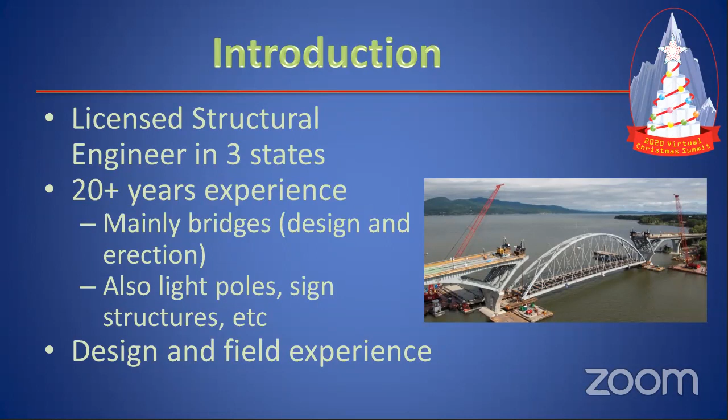There's a lot of people out there that have had experience, but they don't necessarily know what they're talking about. Or when you're first getting into it, you don't know what is good and bad or who to listen to. So I put this slide in here not to necessarily brag, just to say I've dealt with this stuff on a much larger scale.

And this is why I'm giving these tips to people, what to look for, what to avoid, what to pay attention to. So I'm going to talk a little bit in the introduction about what is a megatree. Here's a bunch of pictures of megatrees that people use with all sorts of singing faces on them. They don't have to have faces, you don't have to have pixels. You can have whatever you want, just single LED type lights.

But it's really tough to define what a megatree is. So basically, I just said, well, it's any type of pole or pole-like structure, because a lot of people use trusses, that you use to hang your lights off of. And I'm going to say it's going to be tall enough that it could fall over, and kind of the important part is to do damage. If you do something that's 4, 5, 6 feet tall, if it falls over, no big deal. You can drive those in with those little green fence posts or something like that, use a piece of PVC. You're not going to have too much damage.

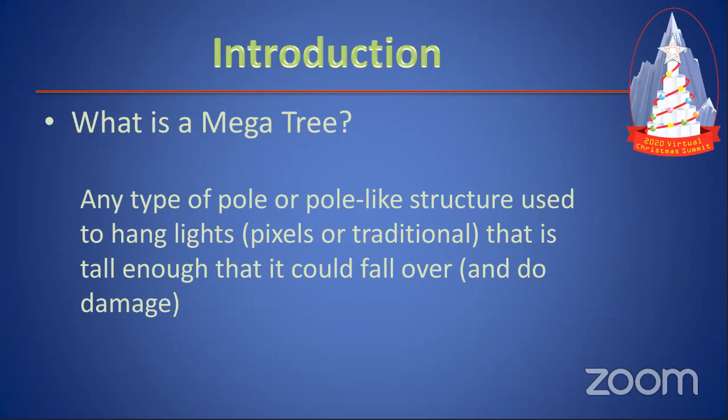When you start getting into 8, 10, 12 feet, that's when you start really getting into that - that can do some damage. That's a little harder, you need a ladder to get to the top of it. You get anything into the 16, 20 foot range, then you're starting to get even more dangerous, and over that, even more so. So there is no limit of how tall a megatree is, but I try to make these tips good for anything - the bigger, the more concerned you have to be with it.

So these are the 10 tips. I'm going to give them to you now just so you can take a look at it and see my 10 tips for it: use guy wires, you got to pay attention to your anchors, you got to have a good base, you got to have a good pole, you got to have a good topper, you want to make sure it's level and plumb, you need to know how you're going to assemble it, good, fast, and cheap - those are all important factors with it, and a lot of people are too overconfident in what they do.

And there's a lot of misinformation out there. So there's my 10 tips for megatrees. If anybody has any questions, I'd be happy to take them. I told you I was going to try to keep this short, and I did that.

Obviously I am just joking with that. I'm going to go into much more detail, but I like to joke around as much as I can and keep it kind of interesting for people. So please don't run away quite yet.

So guy wires. Guy wires are probably one of the most important things and most overlooked things that happen with megatrees. My simple tip for this is use the guy wires. Unless you absolutely positively know for a fact you will not use them, use them. They're cheap insurance. They help with a lot of things.

Most of us are not designing our megatrees in the sense that we're having an engineer come out, look at it, do things. We're not necessarily getting anything pre-built or pre-done. We're just kind of going out there, finding materials we can, using information we found online, putting something together and hoping that it's going to stay up.

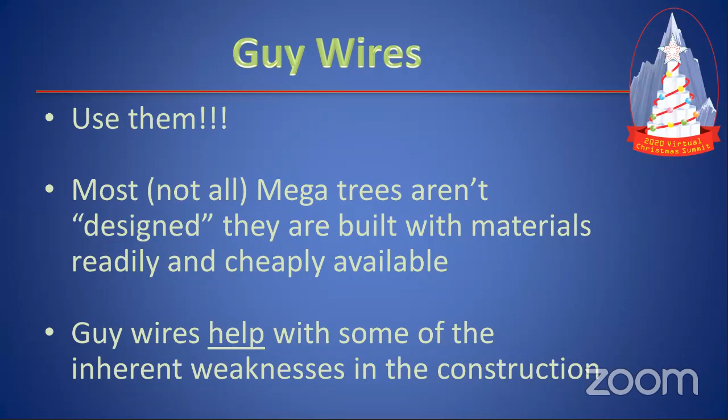The only reason people don't use guy wires is they don't have the space or they don't want to spend a little bit of extra money. But the small amount that guy wires will cost you for the extra insurance of keeping it from falling over, in my opinion, is well worth it. So use guy wires if it is at all possible.

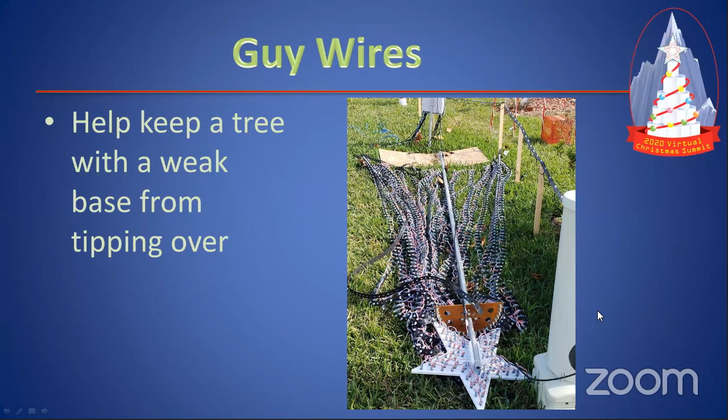I've taken a few photos from a presentation I gave last year during the X-Essentials. You can see here, this pole had a very weak base, very poorly attached to it. No guy wires, fell right over. I don't know if this was during construction or during a wind. Guy wires would help keep this from happening.

Same thing with this. The pole stayed nice and straight. Obviously this pole, or the picture, is a little bit crooked. The pole stayed nice and straight, but the top bent right over. Again, guy wires up at the top would have helped this from happening.

There's a lot of things that guy wires will help. Bad connections at the bottom of your pole where it screws in. A lot of these pictures don't go together, but when you have pipe with threads, the threads are a weak point. They'll tend to want to break. They'll tend to want to fail.

A lot of people have problems here. That's okay if you have guy wires holding up the rest of it, but if you don't and you're just relying on the stiffness of the pole, this breaks, your whole tree comes down.

Another thing to pay attention to is guy wires only protect what is below the guy wire. This is pretty well secured here. You'd probably want a third guy wire, not just two of them here, but it looked like there was only one up at the top holding things. The other two, I don't know if they weren't installed or failed. The bottom stayed nice and strong, the top ends up tipping over. You want to make sure you have three of them at all levels and they're very well secured.

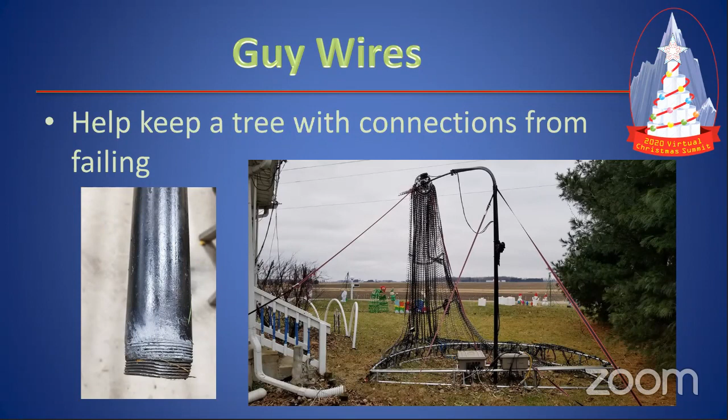So guy wires will help with this. Use them if at all possible. They are well worth the investment.

Generally speaking, with guy wires, you want to install it as close to the top of your pole as possible. I realize realistically you cannot put them directly at the top. You probably have a topper up there. You don't want the guy wires coming out in front of your lights. You kind of want them hidden behind your lights and that. It doesn't have to be right at the top. Get them within the top 2-3 feet.

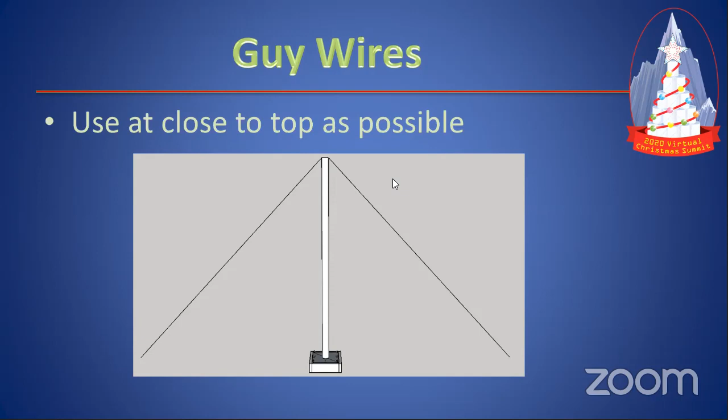It depends how tall your pole is. If it's 16 feet tall and you put them 4 feet down, not a big deal. If you've got a 20-foot pole and you put it 8 foot down and you got a lot more sticking up there, that's a bigger deal. So as close to the top as possible with your guy wires. The bigger your pole is and the more transitions you have, like here, if you have a thick bottom section and a thin top section, add 2 layers of guy wires, 3, 4.

It doesn't matter how many layers you put on there, they're all adding stability. They can come down to a single point at the base, but the more you have, the better off you are. It helps keep things secure.

If you have a transition like this from one to the other, put your guy wires above the transition rather than below it. That'll help secure this and take some of the stress off that weak point with the connection. Anything you can do to get stress off the connection will help you in the long run.

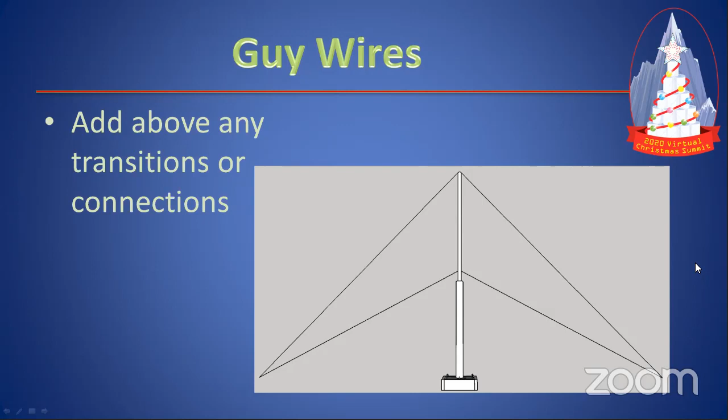So if you haven't gathered it, use guy wires. It's always good to do. And I mentioned this with the other slide: guy wires only protect what's below the guy wire connection, nothing above. So the higher you go with them, the better. The more levels, the better off you are.

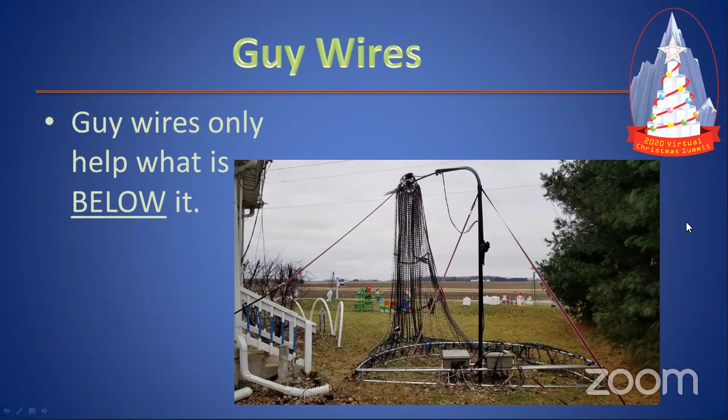At each level of guy wire, you want to use a minimum of 3 guy wires coming off your tree, and ideally they'll be at exactly the same angle between them, which would be 120 degrees apart.

If your tree is at 180 degrees on the right-hand side here, this one kind of gets in the way. I know it's a pain, but you still need that there in case the wind blows the opposite way and tries to blow things over. There would be nothing preventing it.

Don't rely on your strips to be guy wires. They really don't have enough strength and usually aren't well anchored for that. So you want to use all 3 as best you can.

If you can't get a perfect 120 degree angle, that's not too bad, but you don't want to stray too far. If these 2 back ones here are up and down on the page, and this is a top view for those that didn't figure that out, if these 2 are in line with each other, you've got no support from the back side here. So you want to keep these angles as close together as possible.

If you can, use 4 guy wires, 4 or 5, keeping all the angles about the same no matter how many you use. Really 3, 4, or 5 is the most common. If you're getting up to 6 or 7, you're probably just overkill at that point. So 3, 4, or 5 is what I would generally recommend. Most people will do 3. 4 is semi-popular too.

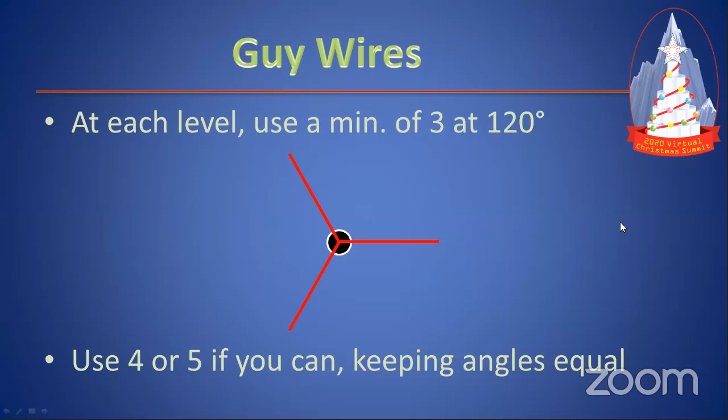So that's my tips for guy wires. Next, I'm going to go into anchors. The anchors of the guy wires are what secure that down to the ground. If you put guy wires in and don't have a good anchor, it was kind of pointless to use the guy wire. That's why anchors come right after it. You really want to use this.

These are a couple of pictures of failed anchors here that just pulled right out of the soil. Nice spiral anchors, really good for really low weights, but as you start getting into much higher weight, it just pulls right out of the soil when you twist them in.

It is also very, very easy to over-twist these type of anchors. You're putting them in by hand, probably putting a piece of rebar or a long wrench around it, twisting it down and in. You turn it a bit too much, and rather than having it come in like a corkscrew into the ground, it basically just cuts off the soil on each side. Give it a little pull, it pops right out of the ground, getting rid of any of the cohesion that was on each side of the anchor.

Do not over-tighten these. Very, very important not to do that. They're also very dependent on soil type. If you have a very weak soil that can't take tension, they pop right out. Christmas in the States is during the winter months when it tends to be wet in a lot of locations, tends to be snowy in a lot of locations. As soon as your ground gets wet, it loses a lot of its strength and it pops right out.

These ones over here are your typical little stakes that you get at your camping stores or Walmart or something like these. Never, ever use these. They're not going to give you any support whatsoever for guy wires. They're fine for putting your strips down to keep them from blowing around in a breeze, but they are not intended to take any tension really on them. If you hook up a guy wire to this, it's going to pop out of the ground.

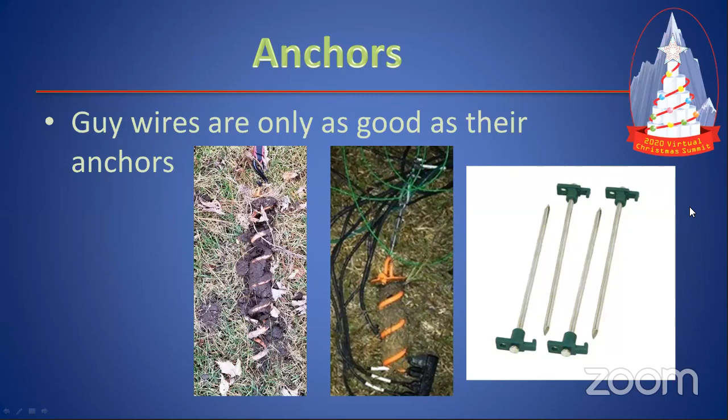Maybe not initially, but over time, it's just going to work its way out. Do not use anything cheap and simple like this. You want to spend some money on these. You want to make sure they're going to go in.

Anchor strength depends on a lot of different things: the length of the anchor, how deep you're going with it, and the type of the anchor. The ones I showed from Walmart are just a straight type. There's also screw type, and little anchors that go in deep and then pop out like a little leg.

It's highly dependent on your soil type and soil moisture. Those are the big things, and a lot of people have no idea what type of soil or moisture they have, and forget that soil moisture changes over time. Also, if it's previously disturbed soil, the first time you put it in your soil probably wasn't disturbed much, depending on the age of your home and what went on there. If you just had a home built and they messed up everything, it could be disturbed. Every time you disturb the soil, it loses some of its strength and can be a problem.

Even if you think you know your soil type, you might think you have really clayey soil because it's tough to dig. But just because you think it's clay doesn't mean it actually is clay. It might be something else from an engineering perspective.

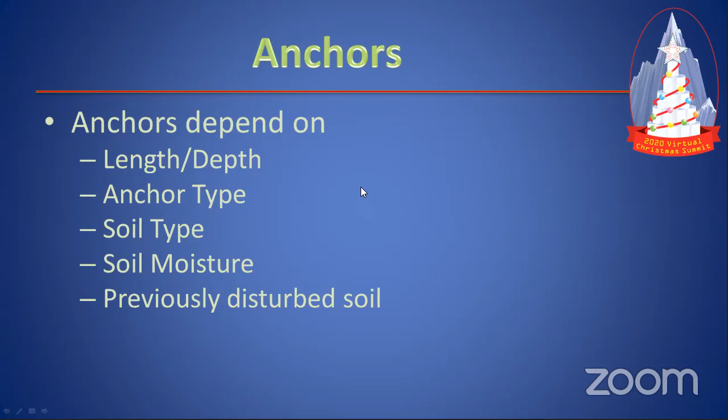Geotechnical engineering is a very inexact science, so there are a lot of assumptions made with that, and a lot of variation. This is a snippet from American Earth Anchors, who designed some anchors I'll show on the next slide. This is their caveat to all of this: it's an inexact science in an inexact environment, and you don't really know what's going on. They make some guesses to give you general ideas of how much strength their anchors will hold, but it's not real numbers you can guarantee will happen.

It's an informed guideline, not a guarantee, and that's where people get into problems. They think, well, this anchor said it was good for 100 pounds, or I went to Home Depot and saw these dog anchors good for a 100-pound dog. That doesn't mean it's going to hold 100 pounds under every circumstance. It doesn't work like that.

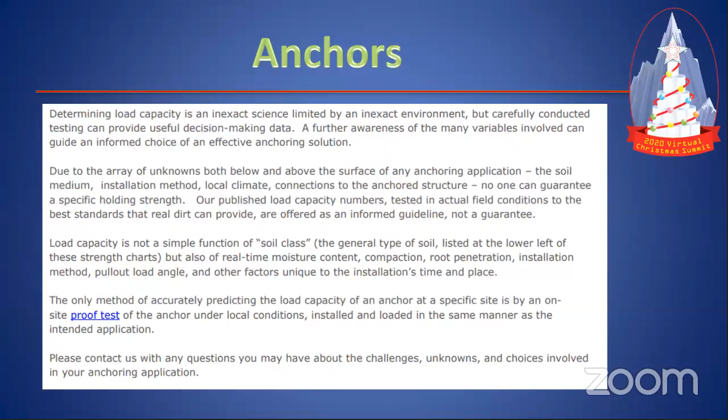Ideally, everyone would have their soil tested to see what anchor they need for their situation, and what the best bet is. But nobody's going to do that. I realize that, nobody can afford that, nobody wants to spend that much money. Unless you're doing a really, really large tree, it's just not practical.

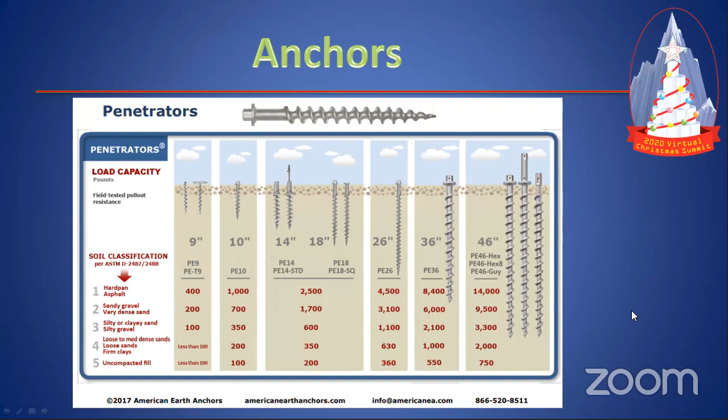This is something that is very difficult. There is no one size, one type, all-fits-all anchor for everything. When in doubt, go larger. And you've got to remember that your guy wires are useless without these anchors.

So many of the megatree failures that I have seen pictures of are not necessarily failure of the guy wires themselves. They're failures of the anchors pulling out of the ground. Somebody didn't quite have them attached right, they pull out. It's very rare that you see these straps or the wire used for the guy wires fail. Very often it is the anchors.

So when in doubt, go larger, spend a little more money there. I know it's hard to do because that's not anything anybody sees. Do as best that you can there.

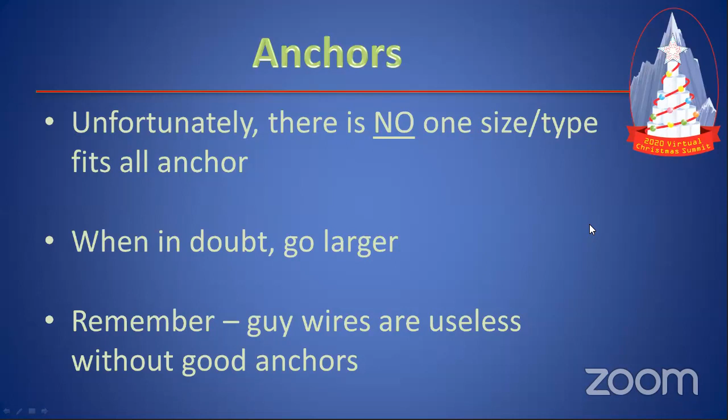Remember too that you don't just have to anchor into the soil. You can use something like dead weight, put sandbags on top of that, attach the wire through to your anchor, and then go into a specially built block of concrete that has an eye bolt or something like that in it. That's what the big antenna towers use. They come down, they go into a block of concrete and anchor there. What you want is weight so that it's not going to move around at all.

So I think I've talked enough about that. Going to move on to your megatree base at this point. There are 3 things that you could do for your base, in my opinion.

You can make it very heavy so that it doesn't move. You can make it really wide so that it doesn't move. You can anchor it to the ground so that it can't pull up off of that. And you can do a combination of these. You could make it all 3.

Very rare that people will do all 3, but it is possible. The more of them you use, the better off that you're going to be with your base for it not to tip over as you go along.

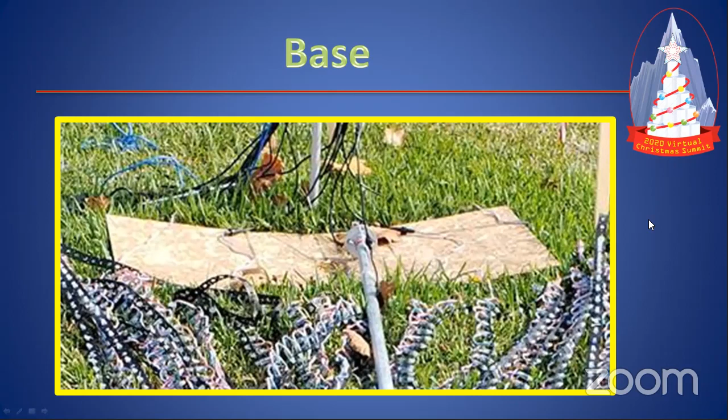This is not a base that I would ever recommend for a mega tree. You want something better. Again, Walter Monkhouse, here's a website to his portable hole. This is probably the most common for your probably 10 to 20 foot range mega trees. He's got instructions on how to build this here.

It's a very good, simple system for being able to construct a base. It's relatively heavy, I think roughly 150, 160 pounds of concrete in a 2x4 base. And it's got positions here where you can anchor it to the ground. He's got 4 shown, but you can get up to 9 on there. But as I'll say in a few slides, you really need to pay attention to the instructions here.

The base alone is not very wide and realistically not all that heavy. So once you get some lights on here, get some wind going, this thing can very easily tip over if you don't have these anchors to the ground. The whole reason you put in these eye bolts is so you can anchor it to the ground. If you're not going to do this, this base is not that good. It's good for erection, good for getting your pole up initially, but then you immediately want to get this anchored to the ground, make sure that it's doing that before you put your lights up.

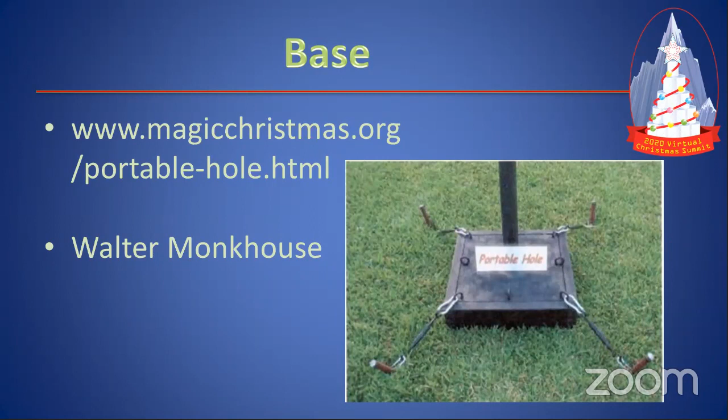Again, the more you can do, the better. If you look at his website too, you'll see where he extends this out with some extender legs in all directions, just based on some wood, and that gives you even more tipping strength. The more of the 3 that you have, the better off you are. You don't want your pole to tip over. As I said, follow the directions.

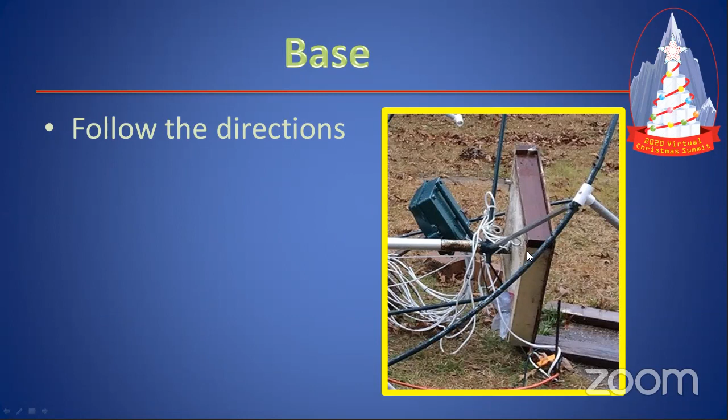They don't look like they were attached. Maybe they were removed, but this is only mildly heavy. It's not wide, not anchored to the ground. It tipped. I'm not surprised at all that happened.

Here's another one, very well anchored to the ground. You can see all 9 of them were used. Didn't have the greatest pole, had a threaded connection here at the bottom, but the base didn't tip over, the pole broke. That's a different design flaw. Not necessarily something we want to go for, but at least his base didn't tip over. It's one step in the right direction. Now we'll get to the pole in a few minutes and see what we can do there.

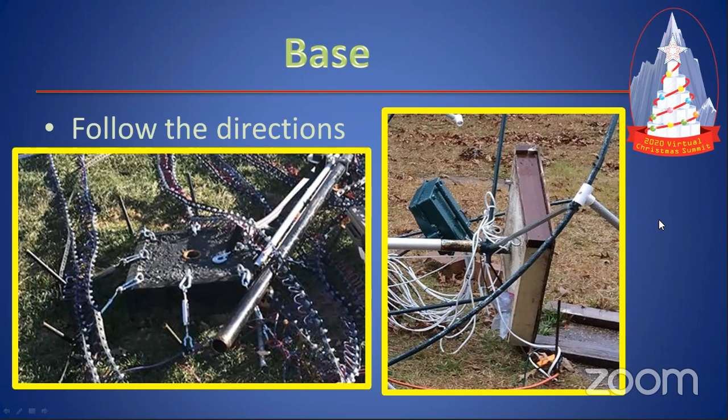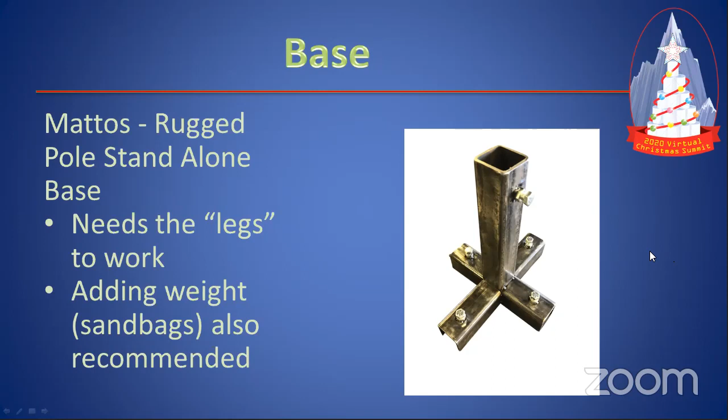You have to add the legs on here. I just kind of drew them in with some lines, but basically if you buy this, you'd need to get some type of steel that sticks out of here. It uses this little bolt to hold it in place to make this larger so that it's not going to tip over. Spreading that out gets you something relatively heavy because the steel is heavy, and a relatively large base, so it can help you out there.

And then you can do something like add weights, like sandbags, on the ends of it to help it from tipping over. If you wanted to, you could probably even drill a hole through that and anchor it down to the ground. A lot of things you could do with it.

So on its own, this right here might be able to stand your pole up initially, help you get something on here, but the strength really comes from the connection of the legs to this. Don't just buy this and put your pole into it. It's not going to work.

At that point, you just may as well waste your time getting an artificial Christmas tree stand or real Christmas tree stand, put it out on your lawn, put your mega tree in it. Nobody would ever actually do that. You know it's going to tip. Don't do the same with this.

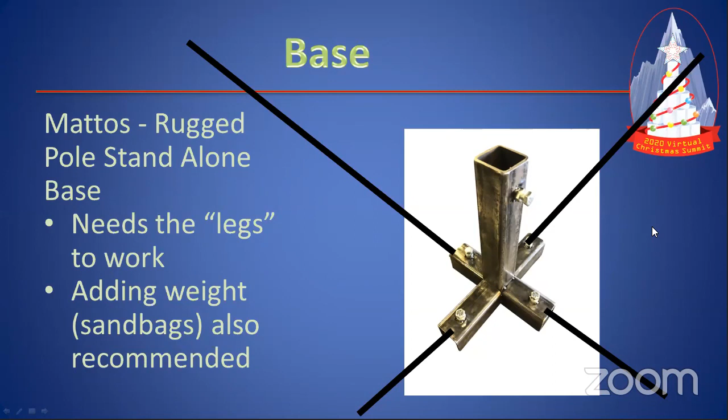Get the pole extensions that go in this. He does sell those, but you can also call a local steel shop and maybe be able to get it a little bit cheaper rather than shipping 20-foot lengths of steel or whatever you need.

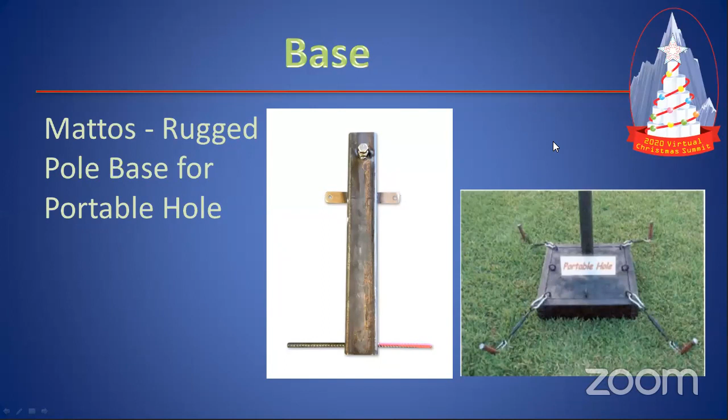So that's all I have on the base. There's more I could talk about with that, but limited time, like I've said before.

So now we're going to get into the pole. Don't necessarily go with just your cheap or easy to find pole. A lot of people will do this just for convenience. They go, well, I don't want to order something special, I just want to go to the big box store that's in my area, get something, make it work. That can work, but it doesn't necessarily mean it will work.

So if you can find something a little bit more involved, especially now we're in July and talking about Christmas lights, you've got time to find something, get it ordered, get it shipped to you, find a way to get it there. Go with something a little more expensive, maybe a little more difficult to find. You're usually going to be better off.

And again, just because it's round doesn't mean it's going to work. People will look at fence rail or top rail for a fence. That's usually not a good idea. That is very weak. It's not intended to hold much load at all.

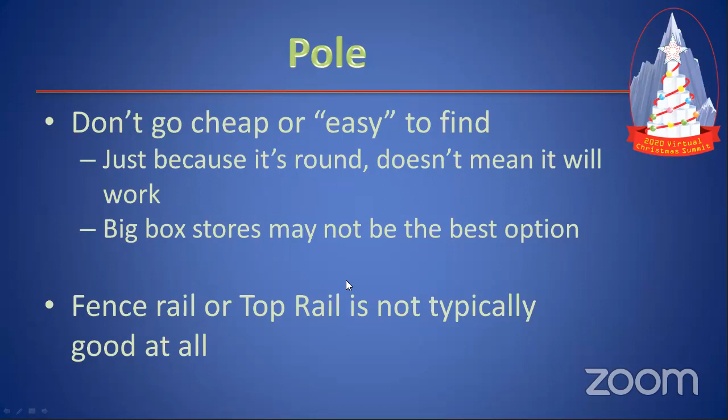It's basically just intended to not sag that much and hold the weight of the fence. Fences weigh a little bit, but not nearly as much as a mega tree going up. It's fairly thin material. There are a lot of megatree designs out there, like Walter's, that will use electrical conduit or some pipe.

You'll hear people talk about all types of conduit and pipe. The difference is which ones you're supposed to be using and which ones attach better together. The problem with pipes is pipes are all the same thing. When you're talking about pipes, they're designed to hold pressure inside of them and not blow up, so you're really using that to transfer ideally fluids or gas.

Some of the conduits are actually electrical conduits, and those are trying to keep water out of your electrical things and protect those. They're not designed to be structural.

Things called tubes are what we use in structural applications. Tubes theoretically can be round or square. Most people think tube and they think square, but they can be round, and they will sell them like that. If you call a steel manufacturer and ask for a round tube, they will know what you're talking about. The problem is you can't just get those type of things at Home Depot or Lowe's or whatever you have nearby, so it takes a little more investigation to get something like that.

Also, tubes will never be threaded because they're used for structural applications—nobody is going to cut threads at the end of those. Things on pipes will very often be threaded because you're trying to screw them together, and that makes a good connection for keeping the water or gas inside the pipe and not leaking out. That's what they're designed for.

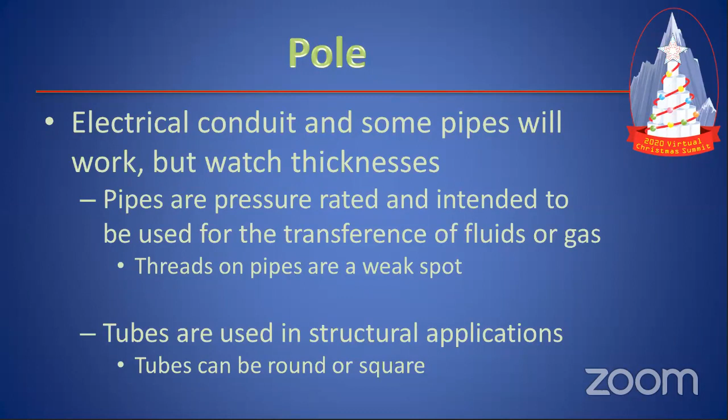This is a little thing I want to point out here too when you're looking at things—there's several different bits of information with square versus round. Most people will use round pipe for making their mega tree. Round is a very good, efficient shape for using materials, because at the same size, if you have a square piece of steel, it's going to be stronger than a round piece that fits in the same thing.

So if we have this square tube here and want to slide something inside it, there's only about 2 inches clear between here—you can fit a 2-inch diameter circle or a 2x2 square thing. If you have to pick what's going to go in there, the square is going to be stronger because it can fit more material out here at the corners than a round one can in the same area.

However, if you compare the weight, this round one is going to be a little bit lighter than this square one, even though the square one has a little more strength. But if you had this square one here and made a round one at the same weight, the round one is going to be bigger and stronger. The problem with that is it doesn't fit inside this hole here.

So it depends how you're going to do your mega tree and what you're going to connect to at the bottom. If you have something like this that you're sliding something in, you're probably better off getting a square tube because that's going to be stronger and fit your hole the best. However, it's going to be heavier than a round one of the same strength, and you have to lift up that weight and get it into the air—that's sometimes difficult. If you look at it just from a pure weight perspective, I can lift up this square one.

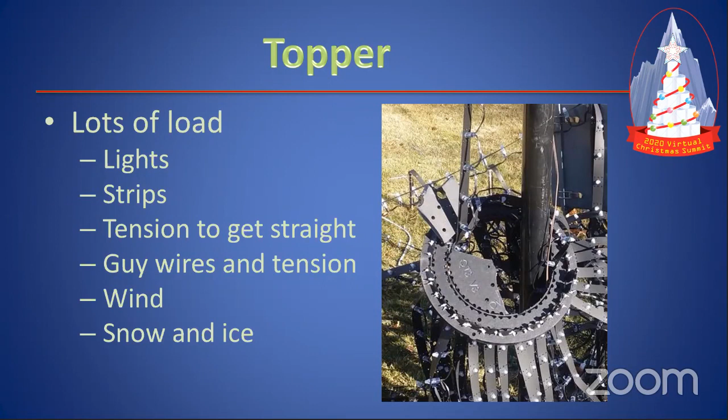Some people will connect their guy wires to the pole or topper, and then you're also adding the weight of that. You've got any wind that is hitting anything connected to it, and any weight of any snow or ice or anything else you may have on there. There's a lot of loads that go on to this. This one here, it's a plastic one, as far as I could tell from this. The problem is you got a lot of rings around here, a lot of lights, a lot of tension. It ends up breaking through that too. You got to realize there's a lot of load on these things. It's not just helping your lights stay apart. So you want to actually make sure you got a decent topper.

I always recommend going with metal toppers. There's the Mattos design here. Boscoyo sells some.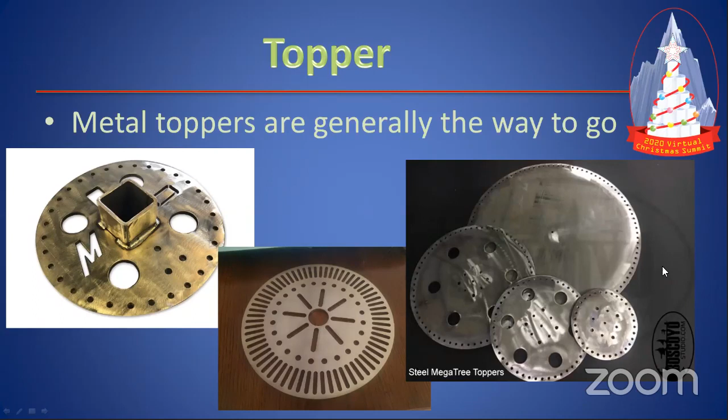This is going to rotate, spin around, depending on how it's made. Attach your guy wires right to the pole, not to the topper. Most of these have holes here, but the holes are for weight purposes or access purposes, not necessarily to attach your guy wires to.

Moving on to level and plumb, and I probably should call this level, plumb, and square because the three kind of work together. A lot of us will try to build the base nice and square, and if you have a connection into it, you'll make that nice and square with the connection coming out to the bottom of the base. You put it on a level surface and pour your concrete into it, or the prefabricated ones are just going to be nice and square because that's how you want to do it.

But then you forget, if you're square between your base and the pole coming out of it, and you put it on something that isn't level, your pole isn't going to be level. And if you don't have a level pole, it's going to want to tip or buckle over. So this is the problem.

If anybody here has done any home remodeling, you'll run into this all the time. You can either have things level or square with things like a doorway or drywall, but you typically can't have both because people don't take the time to build things perfectly. That was the biggest thing I learned growing up, my father trying to get everything in the house level and square, top and bottom. When your bottom's not level, it's not going to be square and level at the top. It's just not going to happen.

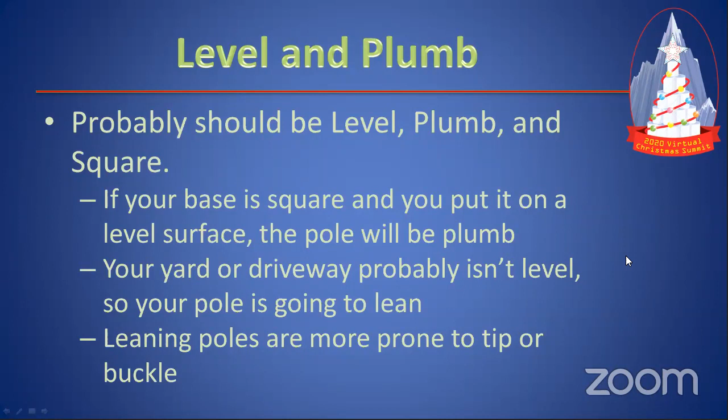Same's true here. You want to make sure you're accounting for the fact that your yard or driveway probably isn't level. This is one example where the base tipped over - you could have this square on the foundation, but your foundation moved, dropped on the right side, higher on the left side.

It's no longer nice and plumb like it should be. You don't want your mega tree looking like this. This is still standing, but your mega tree probably isn't going to be if it's doing that. We don't think about how unlevel something has to be to make a big difference, but an eighth of an inch per foot length, or a 1% grade slope in your lawn, is pretty typical - a lot of times even more than that.

If you have your driveway or front lawn, you usually want to drain away from the house, so it's on some type of slope. An eighth inch per foot, you're not going to notice visually typically. But when you make a 20-foot tall mega pole, that's 2.5 inches of deflection from bottom to top - that's a big amount of deflection. If you're only using a 2-inch pole, you're already off from the center of the pole, what we call eccentric loading, and your pole wants to bend, your tree wants to tip. You've already pre-put in a bunch of load onto the pole.

So you don't want to necessarily have a nice square base that's flat on the bottom with a pole coming straight up if it's not going on level ground. You may want to account for that with your design. If you've got a bigger sloped yard, you want to account for that even more. When I talked about heavy, wide, and anchored to the ground - if you have a big slope on your lawn, you probably aren't going to be able to go wide unless you put some type of shims under it or do something like that.

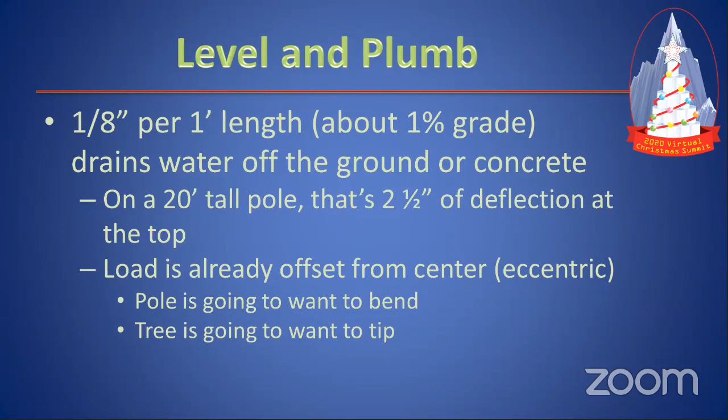That's where you would want to go heavy as opposed to wide and anchored to the ground or something like that.

Guy wires seem like they can fully fix this, but they're really not going to. If you've got something at the bottom going straight up, guy wires are great. But if it's going off at an angle and you pull it back, that's going to put bending into your pole and start to put all sorts of other stresses in there.

Don't try to level with guy wires. Those can fine tune things if you're just a little bit off and really anal about it, that's great. But if you're trying to pull it back two inches, no, that's not the right way to do it.

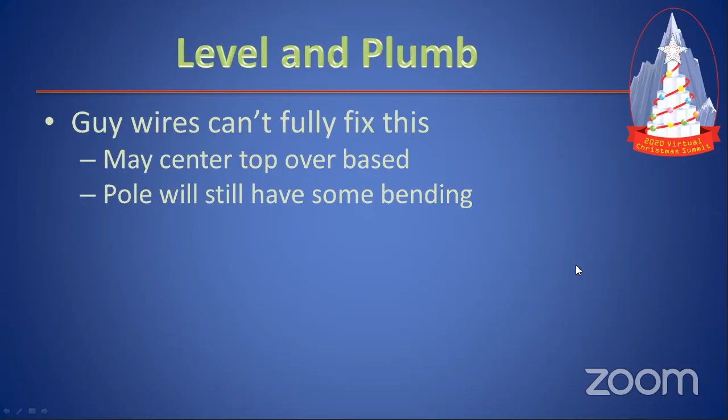Level it up at your base. Put something underneath it, get some sandbags, get some extra cement, do something there, even if you have to dig down to get a nice level base if you didn't fabricate it for it. You want to make sure you get things level and plumb, or you will run into problems later.

A smaller base requires less level area because you're over less area or length you have to worry about, but it's more unstable than a larger base. So again, there is no one size fits all answer.

You need to design for your situation. That's why a lot of these things you see online, people say, oh, I just use this one particular thing, it works great for me.

Well, they might be in a nice plain area that doesn't have much of a slope at all. Then you get into another area and it's all hill, and you can't find anywhere bigger than a square foot that's going to hold anything level. Everything goes. So there is no one size thing.

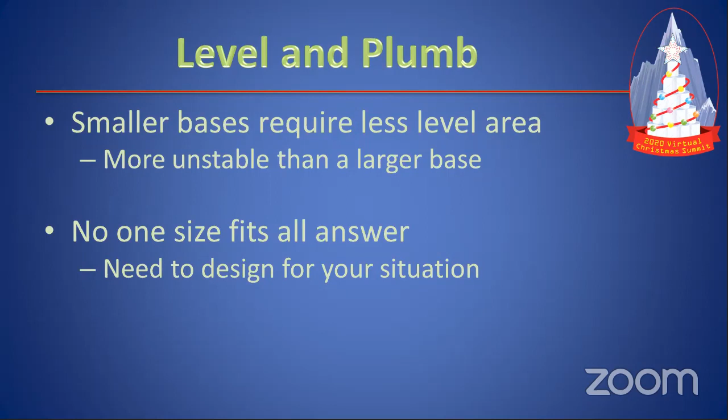You've got to design for your situation. You've got to look at your particular details and make sure you're doing it for that. Don't just do what somebody else did because, hey, it worked for them. Look at your own situation and look at their details and see if it will work for you.

Going on to assembly. How are you going to get your pole up in the air is a big thing that people really don't think about. We've got things like the ASAP pole out there, and people are saying, well, I'm going to get the Rohn tower or something along those lines. Here's another one that's pretty much a lamp post or light post, depending on what you're calling it in your area.

These things here, you're not going to pick up by hand. You need to get a crane out there to do it, or multiple people to do it. That's an added expense that you're going to have.

Will the crane lift it? Do you know how to assemble it if you have a crane out there? Is the crane going to tip over when you're trying to do it? We've had members in the community have things collapse when they've been lifting it up with a crane. That's really dangerous. You really got to know what you're doing.

Will you have the room for a crane? You've got to think about how you're going to get this up in the air, what's going to work, how you're going to get everything up there.

These are extreme examples because they're pretty tall and pretty hefty to move. But even a typical length of pipe, you can get some pretty thick-walled pipe that's going to make a nice pole, and you're not going to be able to stand it up on your own because you just don't have the capacity to do it. So think about how you're going to get this from a nice horizontal position to vertical and plumb, no matter what your base is.

A lot of people don't think about this. They just start building. You get to the end, and it's like, I don't know how I'm going to get this up there. Now you're renting a crane or you're doing things very unsafely.

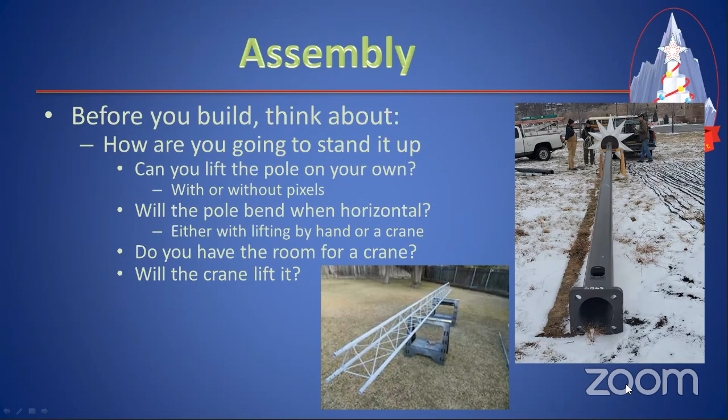And once you get this thing built up, if you have any problems, how are you going to get to the top to fix it? Let's say your topper breaks, let's say one of your lights comes unhooked. Can you get up there to fix anything? Do you have the means to be able to do that?

Do you just leave it for the year? Do you call it good? I'm not sure what you want to do. That's really a personal decision. Some people will want to be able to fix it, some won't.

But if you've got something 20 feet in the air and don't have a ladder to get up to that, when everything's well spread out, you don't necessarily want to be running a bucket truck every time you're doing that. So think about these things before you start to build. It really will pay off in the long run for you.

Good, fast, and cheap. This is something that comes up in many businesses. You can have good, fast, and cheap as alternatives that you can pick, but generally you can only pick two. Sometimes you can only pick one. If you want something that's really good and really nice, and you want it cheap, it's not going to be fast. It's going to take a while to get. You're going to have to put in some effort to get that. If you want it fast and good, then it's not going to be cheap. And obviously, if you want it cheap and fast, it's probably not going to be good.

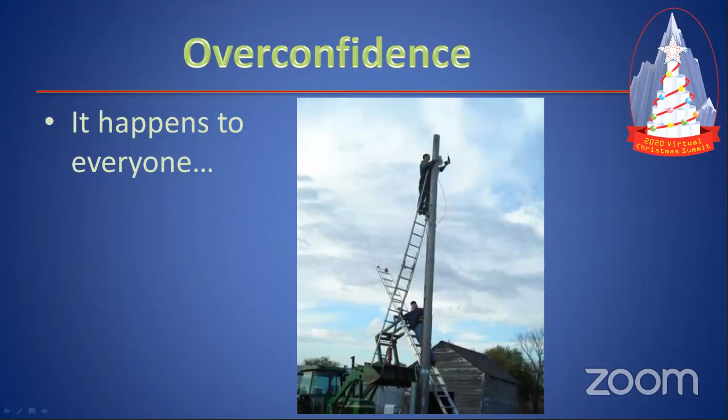We're overconfident. We say, well, I did this last year, it worked just fine, I can get away with it again this year. And also, I've seen this on the internet many times. Whenever you have a tie down strap, or a mega tree guy wire and anchor, you're going to pull on that and say, that's not going anywhere, while you tighten that up.

But no matter what these are, and no matter who says that, occasionally you see something that was strapped down fall off the back of a truck and end up laying on the highway, or you see a mega tree collapse because somebody said that wasn't going anywhere, it'll take any wind, it took 70-mile-per-hour winds this year. Well, they didn't quite follow everything. They forgot they did something else the previous year, missed something. Something wasn't in as deep, or they put the stake in the same location as last year in disturbed soil, it pulls out, and the whole thing falls over.

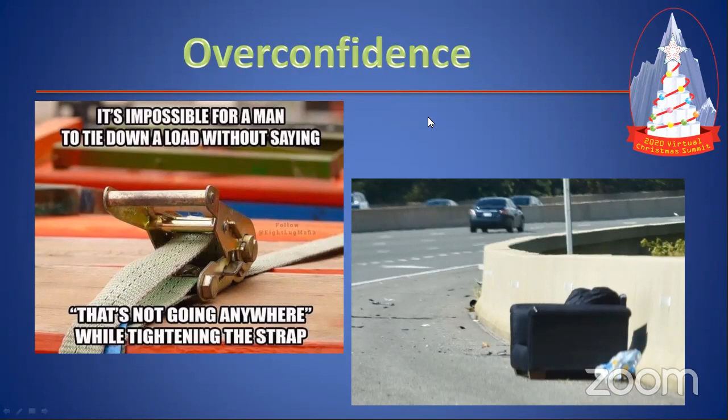Don't be overconfident with everything. Make sure you know it's not going to fail, don't assume it isn't going to fail. The pole I was showing earlier, this was a replacement for one of the designs last year. Nobody thought this thing was going to fail when they designed it, but a 70-mile-per-hour wind came through, bent it right over, topped it over. This was a huge pole. You don't want to see anything like this go down because that's very dangerous. But even in your yard, if it's a smaller thing, you don't want it to come down. You put a lot of time and effort into it.

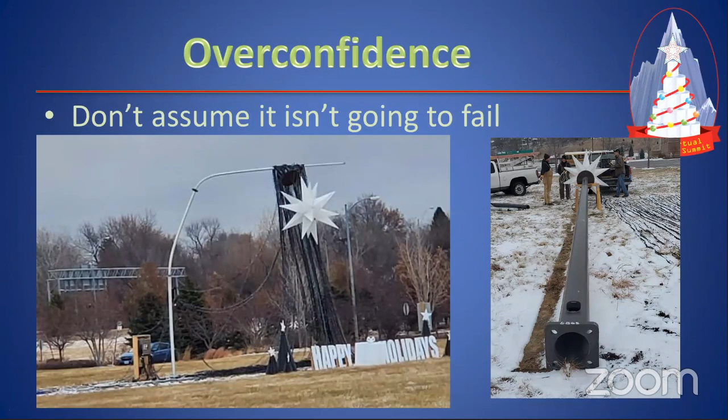Don't just think it's not going to fail. Don't say, I've done this year in, year out, I know exactly what's going on here. Make sure all your connections are still secure, that you've got everything attached well, that you didn't just say, well, that looks good enough to me, it's a nice plumb pole, and then didn't put a level on it. If you were to put a level on it, you'd find it's way off. So don't get overconfident with things. I see that with a lot of people. Complacency, it happens to everybody. Not a bad thing, it just happens.

Misinformation, this is a typical thing. You can find this with almost any profession. Don't just use a Google search and assume you know more than somebody who has a degree in it, in my case, or experience building a lot of megapoles for a lot of other people. The granddaddy of megatrees is probably Walter Monkhouse. He's got a lot of experience, he's talked to a lot of people, he knows what he's doing with that type of stuff, he's done a lot of research on it. He just didn't do a Google search and come up with the first thing. There is a lot of good information on Google that you can use, but there's a lot of wrong information out there too. People aren't intending it to be wrong, it just is. That's the nature of putting things on the internet, there's no control on it.

So don't necessarily trust the first thing you read, or the most vocal person if you're on a forum or a Facebook group who says, well, I did it this way, this is the only way to do it. Look into it, see if it applies for you, see if it makes sense for your situation or not. It may not. There's no easy way to tell without knowing all the details for yours.

So how do you tell the difference between what's misinformation and what's not? Well, you've got to do some research. Part of that is Googling, but don't just Google and pick the top thing. Start asking people, join a group, Facebook groups, Zoom groups, coming to presentations like this, forums, the minis that are all over the place, the Expo, Transworld, anything like that. Start talking to people, see what they do, see if their situation is similar to yours. Ask questions of these people. Don't just say, oh yeah, well what he said makes sense. Ask them some questions. Most people in this community are very giving and will talk about their stuff for hours, kind of like I'm doing here. You just have to ask them the right questions and they'll get going.

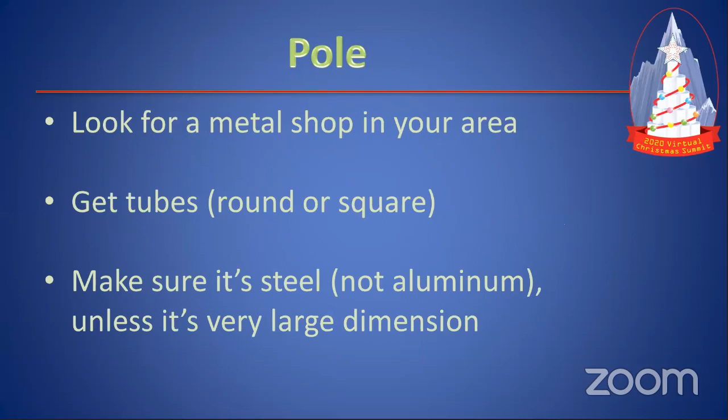So that's a good way of doing it, and that works out relatively simple. Something like the Portabase isn't going to work as well for that because it's harder to tip with the concrete like that. But something like this, where you attach that lever to it - if you had 2 on this side as a lever and tried to pry that up, it's going to work. You're putting a lot of stress on it too, but probably not so much that it's going to bend if you're using 2-inch pipe.

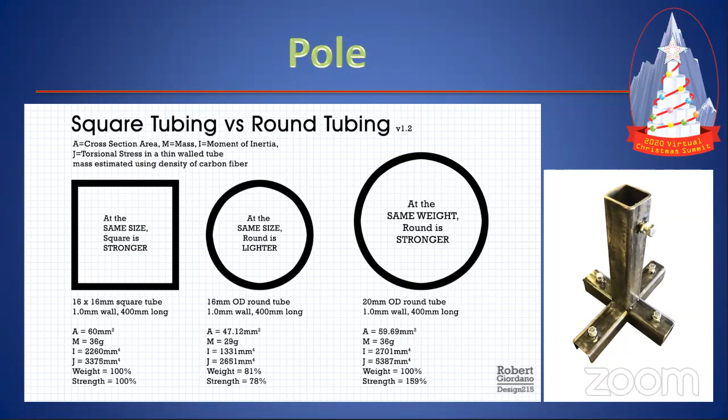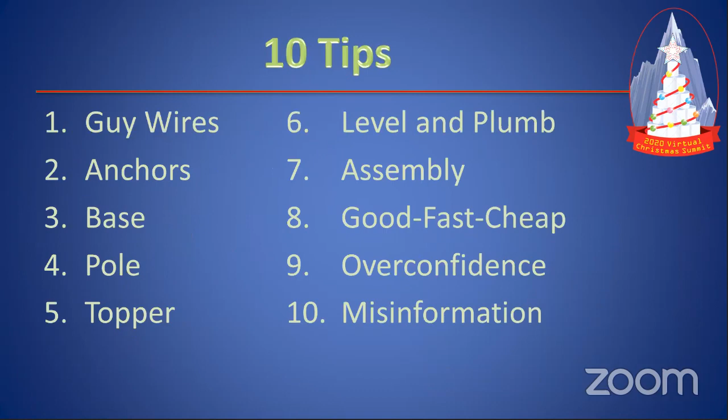Well, if you use another person to help lift it up, one person on the lever and one person on the pole, then it goes up fairly easily. So anyway, that's a nice method, and that way you don't have to put anything in your yard. Now, granted, you're going to have some pipes on top of your ground, but that's not going to show. Correct. Yep, so that's a good way of doing it.